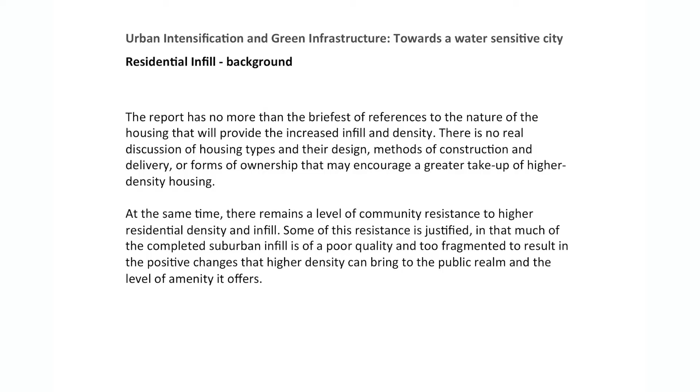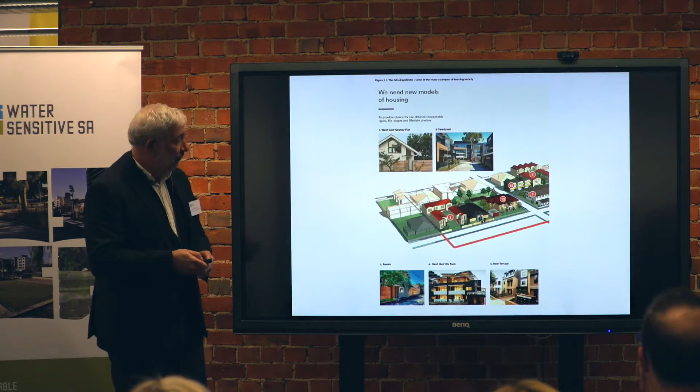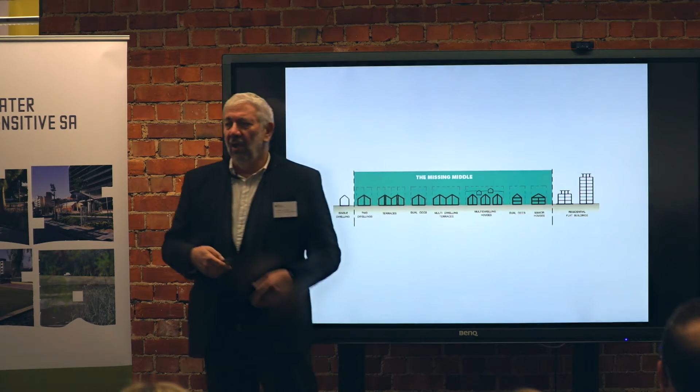South Australia and New South Wales are leading the way in this area at the moment, and of course the New South Wales document, which came out last year in its draft form, followed the very good SEPP 65 document, which changed the whole trajectory of apartment design quality in New South Wales. So they're now looking at doing the same for what they call the missing middle, a term we've all embraced willingly over the last few years. That middle, which is what is between the single residential and the apartment block, and a whole range of housing typologies that could sit within there.

Some years ago, I was involved with Simon Anderson in putting this little booklet together for the Australian Institute of Architects. And the basic question was, how do we improve the current standard and opportunistic piecemeal suburban infill that's going on in our cities? And we invited 20-odd architects from around Australia to put forward propositions that demonstrated how design intelligence might actually affect this kind of higher density outcome.

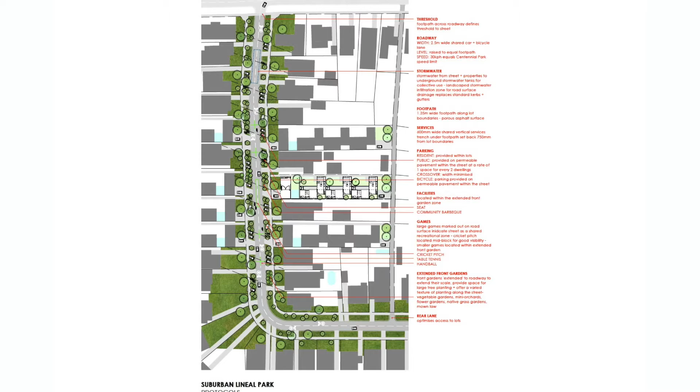And I often refer to this single example as embodying a number of very good ambitions. And this is by Neeson Murcutt, Sydney-based firm that you may be familiar with. But what they were proposing in long existing sites in an area called Five Dock was a tripling of the density. So this is the, can you all see if I, yeah.

3 smallish units, and again, we are still building the largest houses in the world. We're still up around 230 to 240 square metres average. So these are much smaller units, but with a degree of adaptability, flexibility built into them that allows a variety of different household types to take up residence in there. Some shared amenity out the front. You know, there's a group party or entertaining room.

There's a dip pool, there's a workshop, and the argument is that with the increase of rates that is generated by this kind of 3 times densification, you would be looking towards a local authority to invest at least a portion of that additional return into a revamping of the public realm. So they're looking here at converting what is currently primarily a carrier of cars to crossovers to park into a form of linear park. All sorts of things happening along the street.

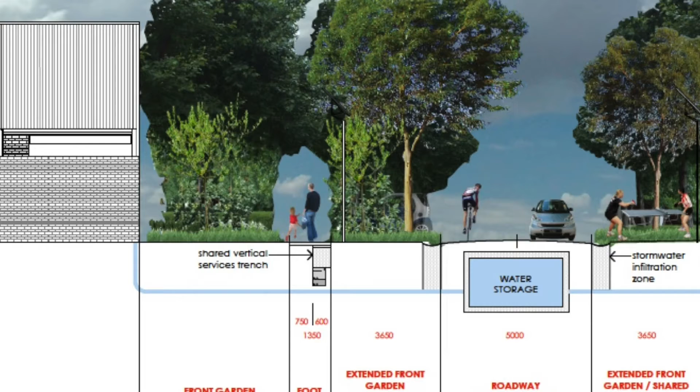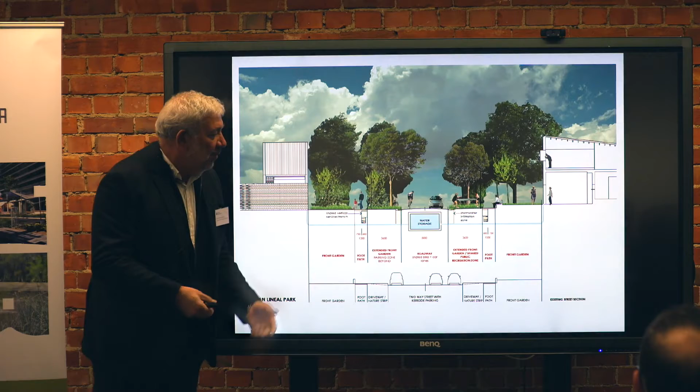Well planted out, lots of greenery with deep soil planting, water farming, that ambition that so many of us have but never seems achievable, which is sinking all of the utilities into a single services pit, so that you don't have to go digging up a street 17 times in 2 weeks to get access to all the different utilities. And you embed in these spaces, which now has a much narrower carriageway, a series of recreational opportunities. So it becomes a space in which people can engage with one another. It helps promote the idea of community.

And that's a closer view of the houses themselves and that section of the street that it is able, through its increased rates revenue, to finance. And if you look closer at the units themselves, they're simple L-shaped courtyards. By incorporating another small courtyard at the rear, you increase a sense of volume and space internally. You increase the potential for airflow.

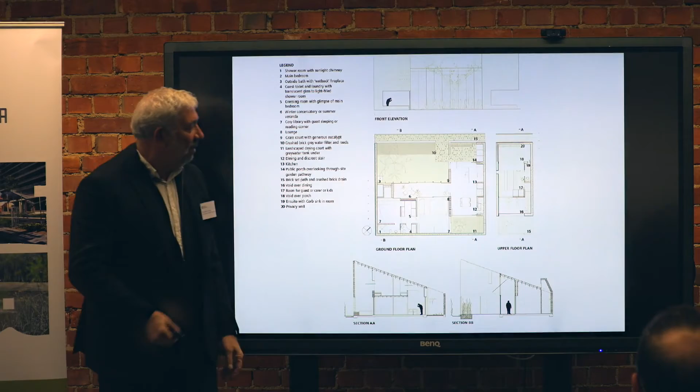There is a small upstairs space which can be used by children, a carer, a friend as a spare room. There's also, you can't see it unfortunately, a bench built in at this end which can convert to beds. So it's a house that has a degree of flexibility, as I said, that can accommodate a whole range of household types. And all of that comes through intelligent design thinking, focusing on how you might extract the maximum from what is in fact a very small area of house.

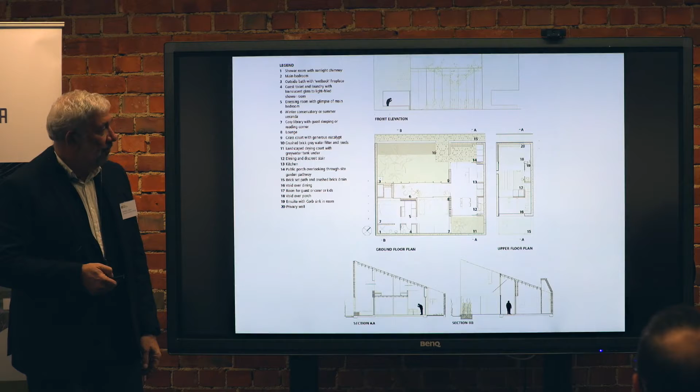Then when I was working in Victoria, I was really interested in exactly what was happening in the marketplace, looking back on what was happening in Western Australia, what was happening in the marketplace in Victoria in terms of infill in the middle ring suburbs, the Greyfield suburbs. And I was also interested in that question, if you started to apply, again, real design intelligence, what might you develop in response to what the market was doing? So my office commissioned the Monash group to take this on as a design research project, and this is where I hand over to Nigel to talk about exactly what they did do.

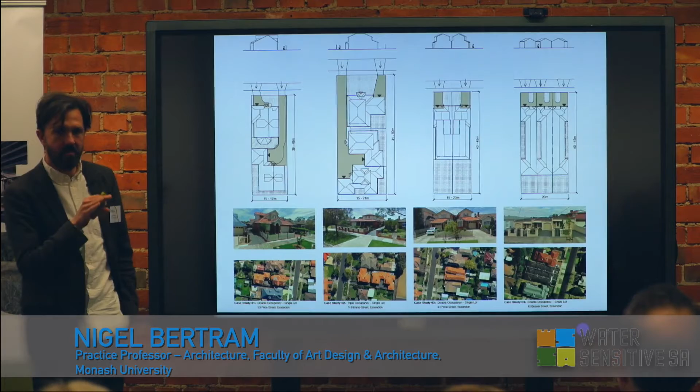Here. So this is work that's done with the group called the Monash Architecture Studio, including colleagues Shane Murray, Diego Ramirez Lovering and Leanne Kaur. And as Geoffrey said, it started off by looking in the middle suburbs at what was happening and a kind of an experiment with could we do something better within the existing rules in a plausible way that would be doable. So we looked at suburbs, if you know Melbourne, like Essendon, around between 10 and 20 kilometres out of the city, and looked at these typical dual and triple occupancy developments. You can see there's the buildings behind each other. Whoa. 3 in a row and 2 side by side and 3 side by side.

And a common factor in all of them was that the open space and the distribution, because they're primarily single story with some 2-story elements, was fairly congested, like the Western Australian examples Geoffrey showed, and also really determined all these ins and outs. The more we looked into why they are like this, it's determined by car turning circle regulations, and all the rules that apply to getting vehicles in and out of the site had much more influence on the way the buildings ended up than any idea of what would be a good space or what would be the best way of arranging 2 or 3 buildings on the site.

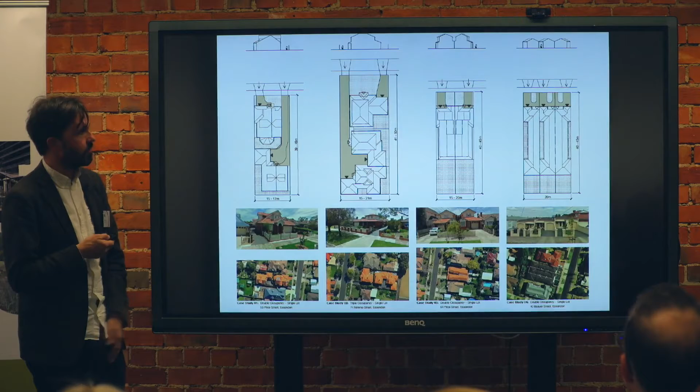So then we found another type was 2 lots that were joined together, where you could have a central driveway coming in with, say, one building accessed from the front, other buildings all with engaged garages. And you can see this dark grey tone showing the area not for cars to park, but just for cars to get in and out of these garages. And the hatched areas, which are the living spaces, are all pushed to the periphery and kind of secondary in the design hierarchy.

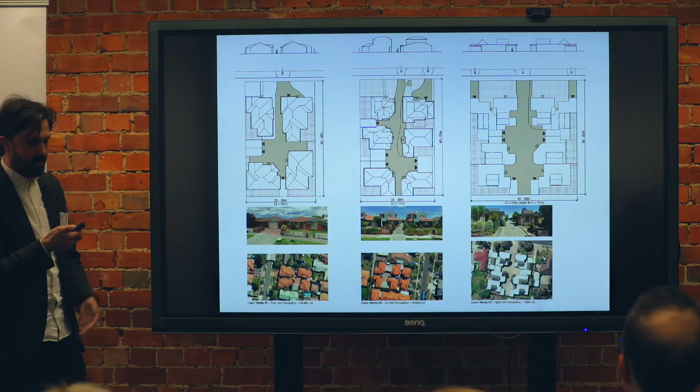So we tried to understand the typical scenarios in order that we could come up with some strategies that would be replicable, not just in one site, but across all of these inner Melbourne suburbs. And we did a lot of research working out what were the types of block sizes, because the actual dimension has a big impact on what's possible. So if you've got a block that's 15 metres wide compared to 18 metres wide, that makes quite a big difference if you're looking at off-boundary construction, which we were assuming here because it's a suburban situation.

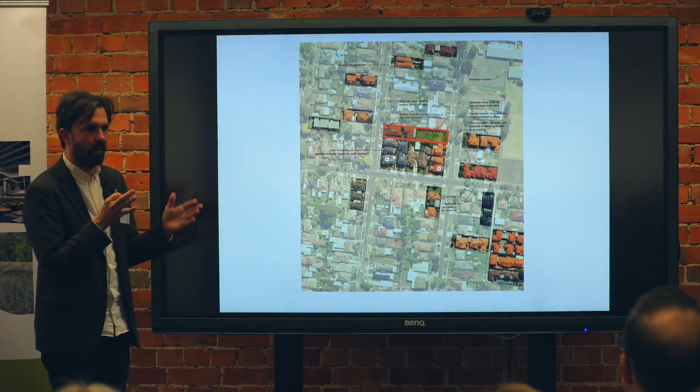And this is an aerial photograph of Essendon, just showing the number of sites in a kind of 5 to 10 year period that are turning over. So even though there's no particular strategic urban design vision, the suburb is changing quite a lot, and each one of these sites involves demolishing trees, reducing the overall canopy cover, affecting the biodiversity and overall sustainable performance of the suburb. And it continues and continues, and we're kind of using up the opportunity of houses reaching the end of their lifetime and transitioning into another 50-year period.

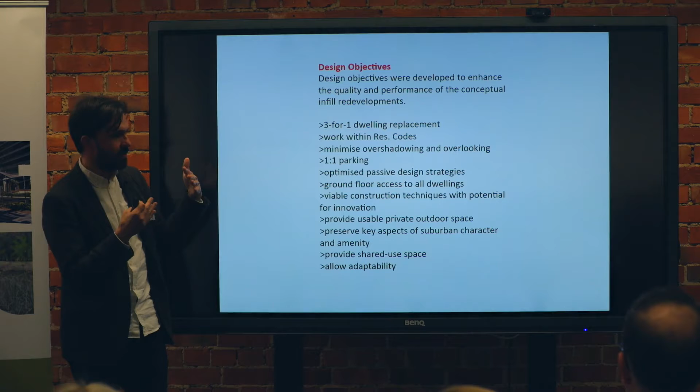So the design objectives set in the brief from the Victorian Government Architect were to look at a 3-for-1 dwelling replacement ratio as a base case. Working within Res Code, which is already a bit out of date, but within the current envelope controls of overshadowing and overlooking, so we didn't have to rewrite the rule book to achieve it. And part of that is minimising overshadowing and overlooking, which are typically in those developments achieved by putting big screens in front of decks and balconies, which makes them feel even worse.

Having a 1 car per dwelling ratio as a baseline, and we'll talk a little bit more about future transitioning of car spaces, which are taking up a lot of the space of our suburbs. Optimising passive design strategies, providing ground floor access to all dwellings, so we're not looking at apartment typologies in this particular study. Viable construction techniques with potential for innovation, so things that could be simply constructed within the non-commercial building companies, so not needing cranes and other apartment scale technology.

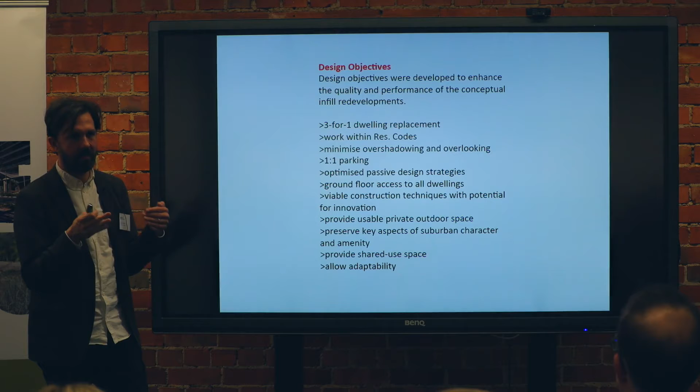Very importantly, providing usable private outdoor space and preserving key aspects of suburban character, which has a lot to do with the landscape character. So that means smaller footprint buildings, essentially, to leave more space for deep root trees, providing shared use space and allowing adaptability. And this work is all kind of pre-design, it's more strategy planning. We thought we really had to rethink the nature of the house itself.

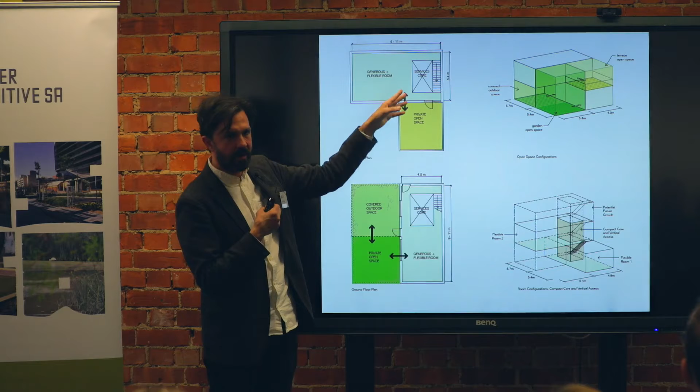And as a starting point, we looked at an idea of large rooms that were all within conventional structural spans, that were large enough to be used as a flexible space or subdivided, and the report goes into detail about how these can be subdivided into bedrooms for different family and household types. Each of these rooms is supported by a services core of wet areas, distributing those wet areas throughout the building, and importantly linked to private outdoor spaces or open spaces.

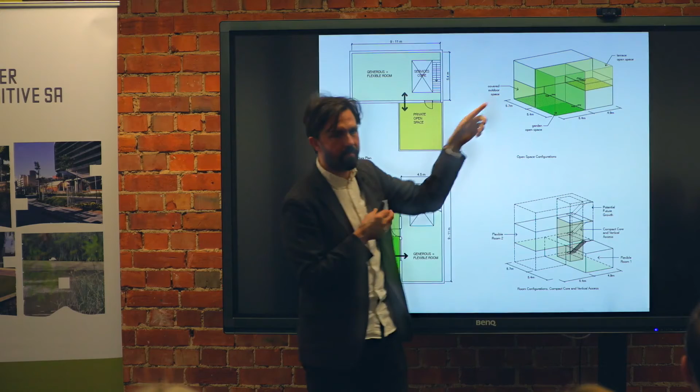So the diagram up here shows the green as a covered outdoor space, a large volume courtyard type garden space and a raised terrace space, and the white behind it is the built volume, thinking how each of those internal built spaces relates to an equivalent outdoor space, to give the positive and negative equal emphasis.

We also wanted to think about a small and affordable dwelling that could easily be expanded. So we think about future adaptation that within the current envelope controls, you could add another story on top by extending the core, or we could infill certain areas.

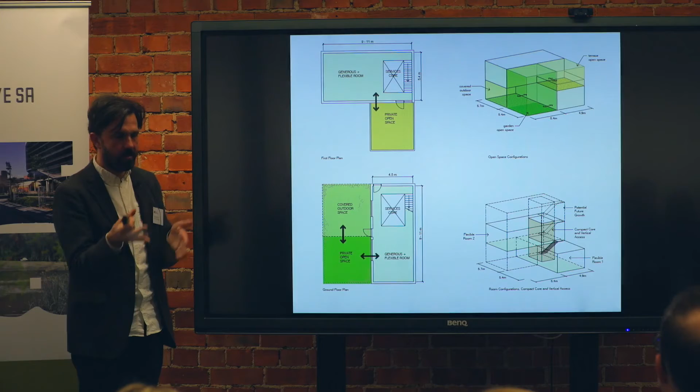So there was a lot of work backing this up about how household structures are changing and how we might need different arrangements of flexible spaces that could change use over their lifetime. They might start off as a bedroom and turn into a living space, for example, but all of this is possible here. And then we looked at applying this to a series of typical sites in combinations of 2 and 3. So 2 back to back, 2 side to side, and 3 in a row.

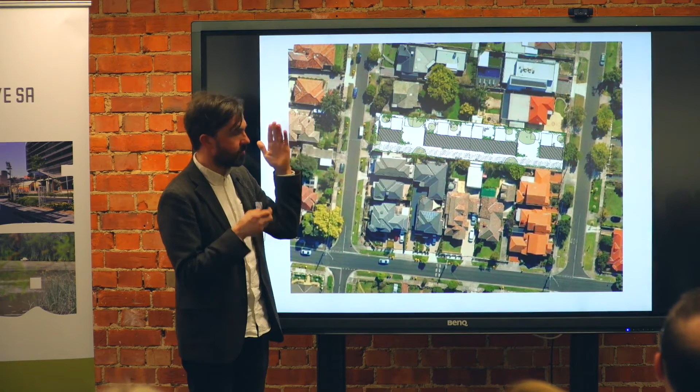And in the process of doing that, we can think about other objectives, such as increased permeability in the suburban block at both a visual, a tree canopy level and a pedestrian level. And this first model, which is an application of that base unit across a linear site, extends a bit of the thinking of that Neeson-Murcutt Five Dock scheme, but across 2 sites where you can join one street to the other, and achieves 3 dwellings on each site, but leaves, importantly, a quarter of the site as open space.

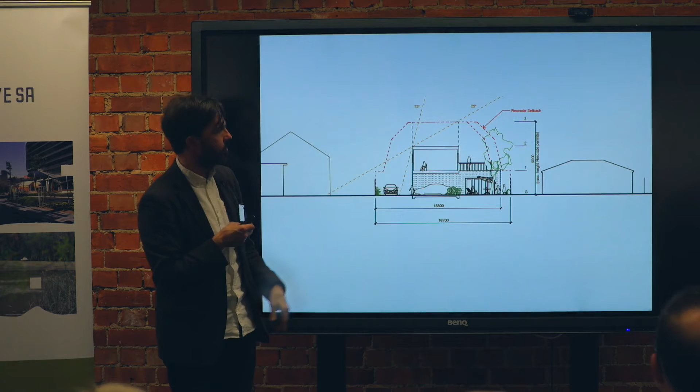And you can see that all the buildings are off the boundary. They all are arranged around a well-oriented courtyard, and they provide good privacy and a sense of communal shared space. The volume, the potential 3-storey volume, is located in the centre of the suburban site, so it has minimal impact on neighbours. And this red line is the Victorian envelope control at the time we did this study for a typical suburban growth zone, and it deals with overshadowing and overlooking.

And this series of plans show the strategy for dealing with vehicles. So we started off with this idea of 1 car space per dwelling that had the potential to either be located in a carport situation as a drop-off, or in this communal open space in the middle. And then the next phase of that would be that we'd say, well, these undercroft spaces are no longer able to be parked in. They might be used as a covered living space, or indeed filled in as a room, and therefore the cars get restricted to coming into the site to this point on both sides, and the cars are parked in the communal area.

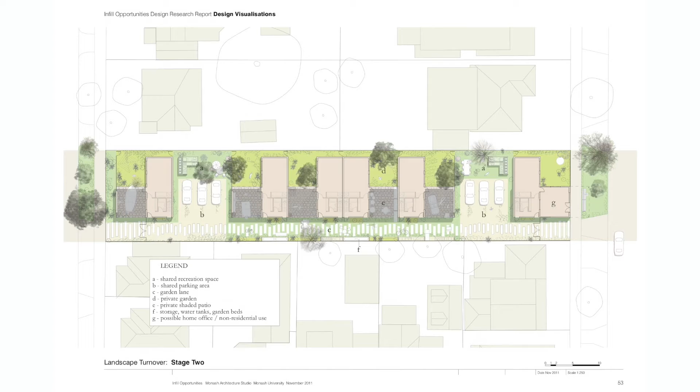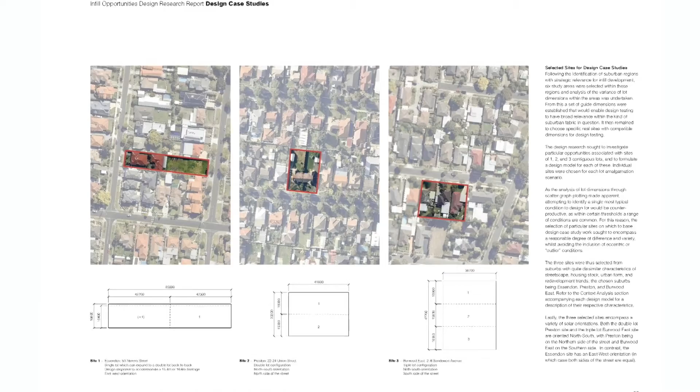And the eventual outcome might be that the cars are switched to more of a share car scenario, or there's less parking provided on the site, and it could be a flexi car, share car, or an electric car that's teamed up with changes in the streetscape, and that central space is given over to communal open amenities such as vegetable gardens or indeed guest spaces.

The project, as I said, looked at back-to-back, side-to-side and 3 in a row examples, and quite a lot of work went into the dimensional properties of those. The yields, just to show the 3 models in a row, there was the linear L-type one, what we called a mansion type, which had a larger building at the front and smaller buildings at the back, that got 6 to 7 dwellings over 2 sites, and the cluster type over 3 sites, where a more complex arrangement of courtyards and access to the individual variants of this basic room and core model were applied.

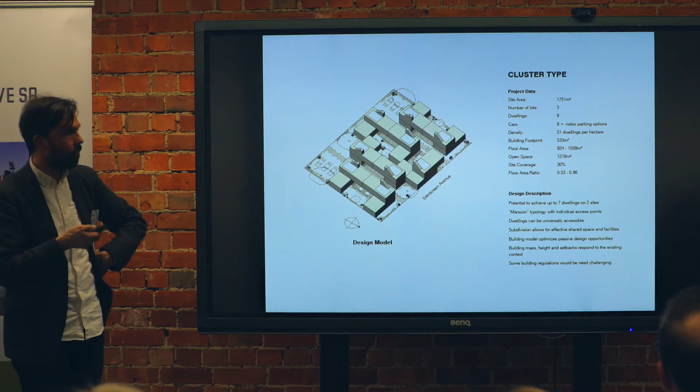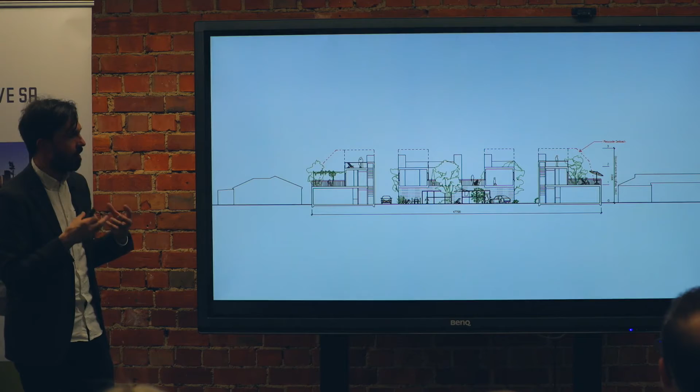And when you look at the cross-section through that cluster type, you can see the kind of grain and intricate density that's achieved at a two-level plus roof terrace type scale in relation to existing buildings. It's not a kind of threatening scale. It's quite a lot of open space and greenery, and cars can be included in the site, or they could gradually transition. So it's a porous, small footprint model.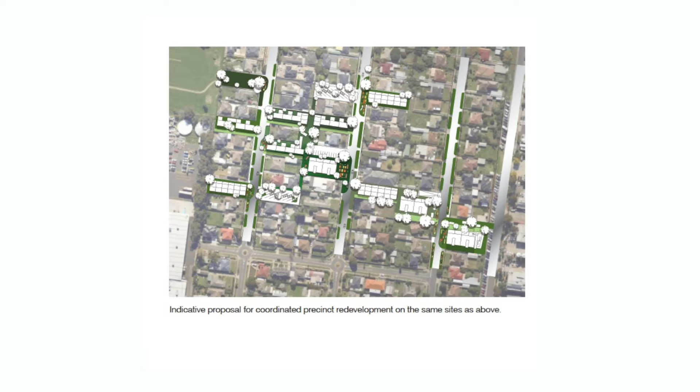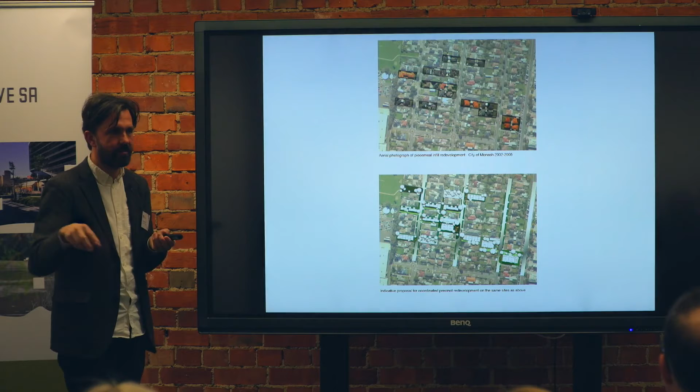And that project got us thinking about if you took that thinking on each individual site and took the scale of development that was turning over in these suburbs, could you think of that as not 8 or 10 different projects, but more strategically as one project that evolved and was implemented in stages? And if you did that, then some of those through paths that we were trying to implement in the back-to-back one, or the courtyard spaces, could join together and create additional urban design benefits that could get us past the totally atomized nature of every lot being its own island within the suburban fabric.

And that led to another project which was done under the funding of AHURI, the Australian Housing and Urban Research Institute, which looked particularly at public housing land holdings. Again, in similar suburban areas, houses in the so-called greyfields, which are reaching the end of their useful life. They all had maintenance issues and were looked at by the Housing Authority to be redeveloped into dwellings more suited to current demographic needs. Typically, small houses on fairly big lots, underperforming environmentally and in need of refurbishment.

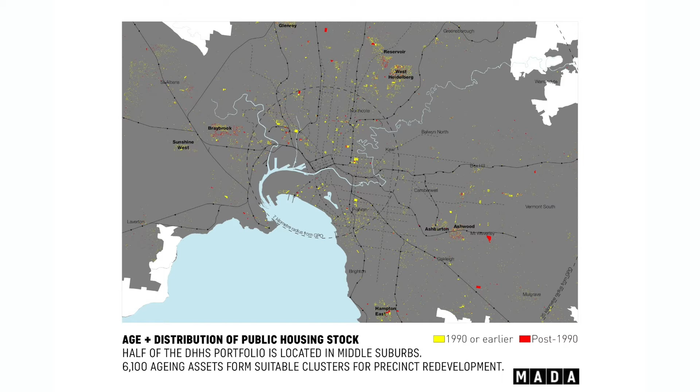And we did some analysis, this is quite specific to the public land holdings of the area. All the little yellow dots are, at the time of this study, which was about 2013, all the government-owned land across Melbourne, and we tried to identify, of 20,000 total allotments, which ones could be used strategically to kickstart a transition of these middle suburbs. Could government be a catalyst agent or a transforming agent that could lead the private sector and give examples of how individual allotments could join up into a more comprehensive precinct-based approach to suburban development?

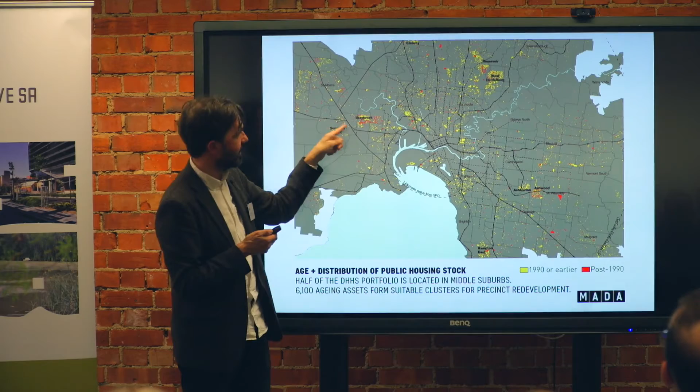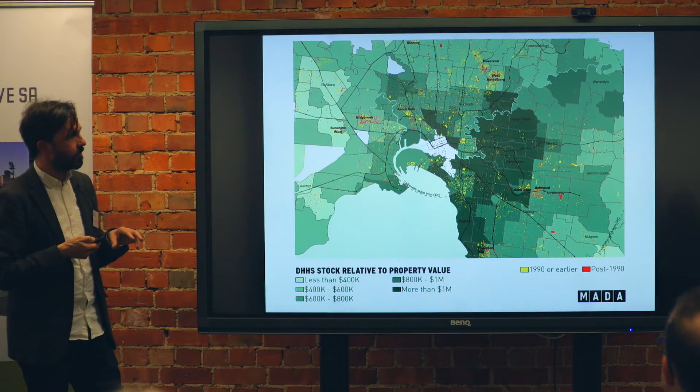Part of that, this graph shows the same land holdings in relation to land values. Over time, since the founding of these original housing estates and their original selling off, land values have shifted in Melbourne, so some of these allotments are worth a lot more than others. And we had an argument about cross-subsidising development. If you thought of it at a whole metropolitan level, could you cross-subsidise development in less valuable areas from that in more valuable areas?

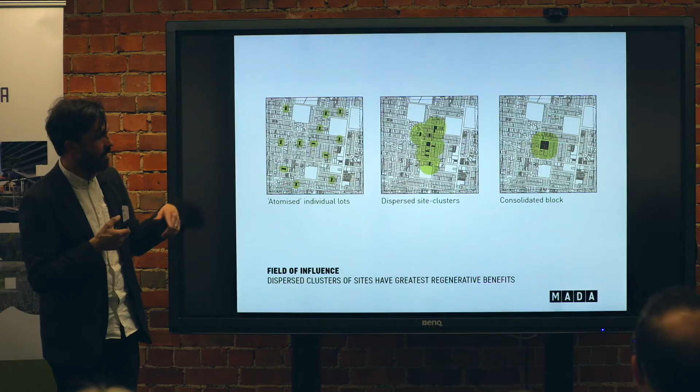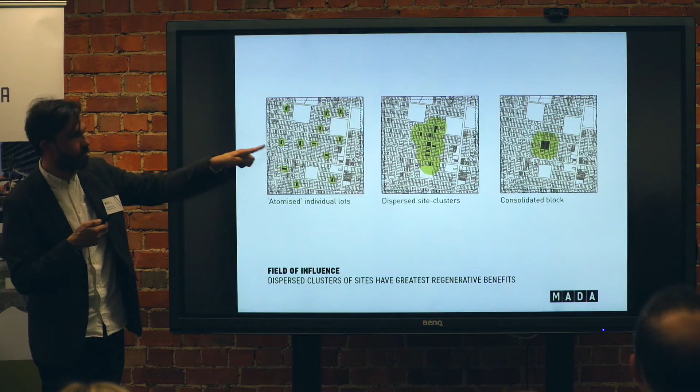The middle condition here shows the typical pattern that we observe, which is a kind of disaggregated clustering of one, two and three allotments joined together. The yellow dots were all in these groups quite close together because they were a previous conjoined housing estate that had been sold off or privatised, but not completely. And that had an interesting potential energy for change, the green area here, when compared to completely individual allotments or a more consolidated development, which is typically more attractive to developers but can be seen as an island or even a ghetto.

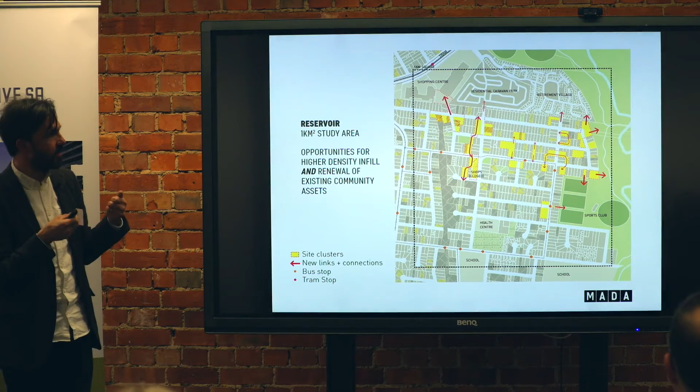So this is two study areas. One was in Reservoir. The yellow shows the current public housing ownership. Within that, some sites have more value than others. Could we use these allotments to open up connections and create not only good housing outcomes, but good connectivity, open space, functional servicing, water sensitive features and so on?

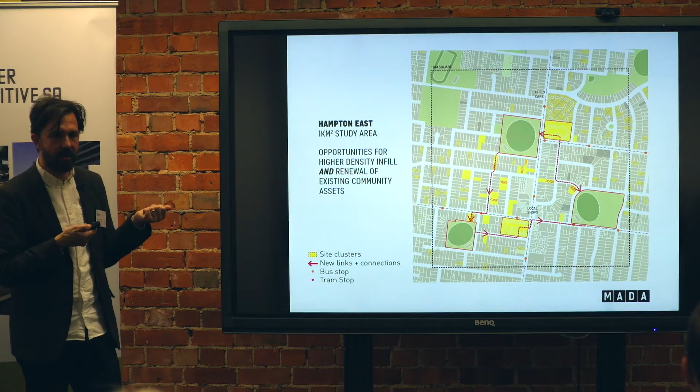And in the other one in Hampton, which was the higher value suburb, a similar scattered landholding could be strategically used to join up existing open space amenity, all these sports fields, into a network that could support a higher density. So making the existing amenity work harder. And that was developed into some test scenarios of 12 allotments. So there were 12 of these yellow sites thought of as one development.

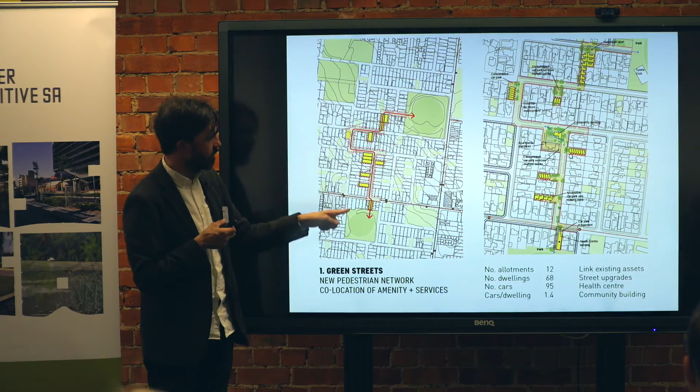This one, where there's a street that could join these two ovals together, could support higher density models that in a piecemeal way transform the streetscape over time, with the idea that the white private sites might follow the lead of the public sector. Or we could target existing infrastructure such as strip shops that had closed down and use that different grain and typology in conjunction with the government-owned land to make a network of activated paths, creating a different grain through the suburb, connected to transport and open space.

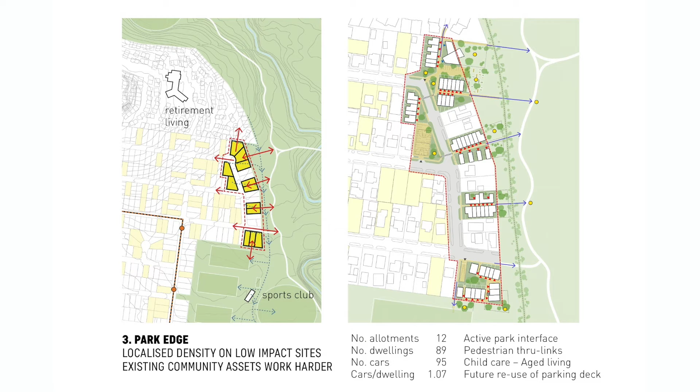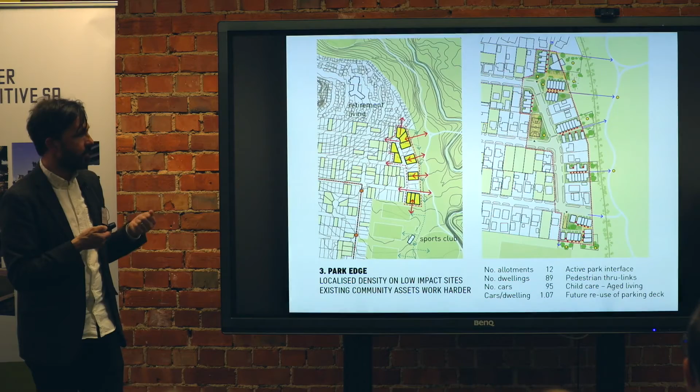Or look at such things as this, which is all over Melbourne and I'm sure most Australian cities: big park areas that are fairly underused and have blank frontages. Could the allotments that face such a park be redeveloped in a way that they also open up access, increase the use of these spaces, allow water drainage to be coordinated, and connect to retirement areas, and all these other fringe benefits that densifying could allow and financially support as wider objectives for the community?

Importantly, we ran a design studio and tried to have a community consultation process as part of this, because we realised that for such a suburban precinct transformation, you really have to involve everyone: the social housing tenants, the other tenants, the local authorities and so forth.

So we had students work to visualise kind of before and after scenarios of the park edge, and took these design propositions and collages and so forth to the community, and with models, and talked through what kind of change might be acceptable to it, and how could the community get on board with the transformation of their suburb rather than have it just happen to them in a passive way.

Because, as I said before, these suburbs are all changing and they're being developed in ways that most people don't like. They either don't like them because we can see analytically that they're not performing well, or they just don't like them because they feel mean and the parking is a problem and all those usual suburban issues. But we found that by talking about it more as an opportunity, right, the change is an opportunity for getting things that they don't currently have, we could put a positive spin on it and allow people to have a say.

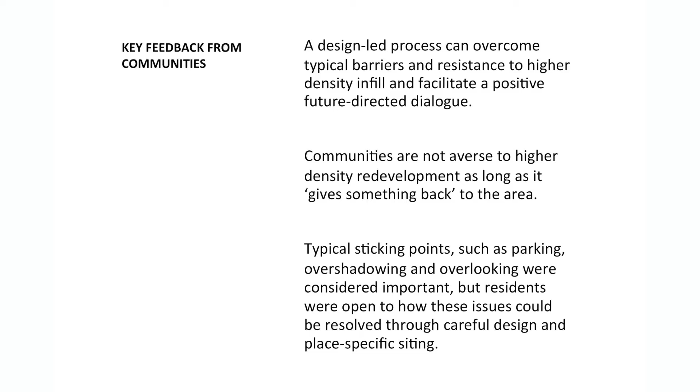And three of the things that we found out of that process were that actually a design-led process where we could show opportunities for transformation and ask people to respond and engage with those can overcome a resistance to development by letting it be a more positive process where there's a chance to have a voice.

The second point is that people, in our two case study consultations, were not necessarily averse to development per se, but they were sick of development that just took away amenity and didn't give something back. So if we could show that higher density and more people could allow the suburbs to have shops that were open, or small meeting spaces, or community facilities that they didn't currently have, that would be a positive outcome.

And sticking points such as parking, overshadowing and overlooking, which were all common objections in middle density, middle suburban development, could be overcome by thinking about careful siting and where height could be accommodated, or where is a good place to put a volume, rather than having blanket height limits and saying we don't want any development over 2 stories, full stop. So we found it to be a very open process, understood as a community engaged transition process that might unfold over, say, 20 years, rather than a yes or no to a single development outcome.

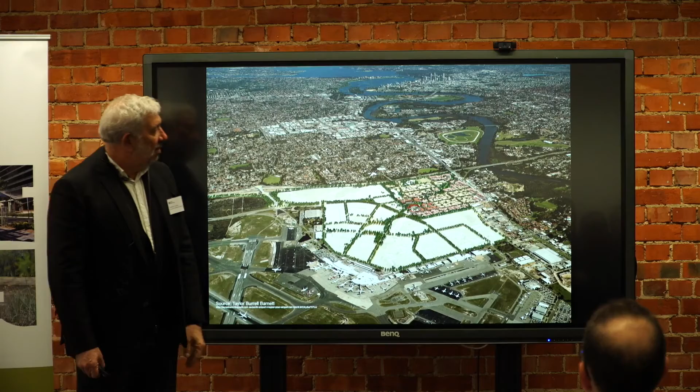So the train station will be around here, and high density residential around it. The Housing Authority's holdings are in this area, which is Redcliffe, and you can see it's really strategically well located. It's very near the river. You can pedal to the river in just a few minutes, and there are a lot of recreational opportunities around the river. And it's very close to the city, very close to the airport. So it's going to become very high value land on which we now have some housing which is well and truly beyond its use-by date, some that is not, but that will be a staged development.

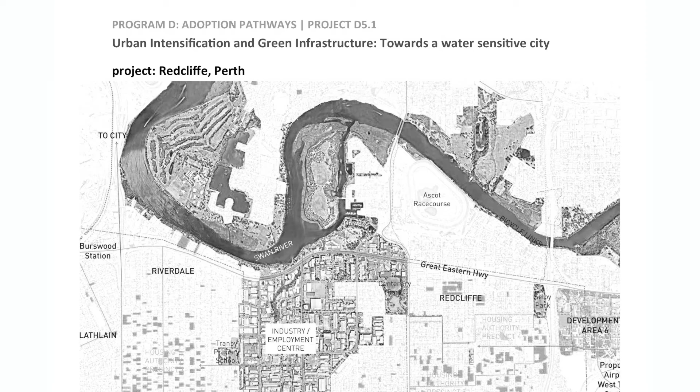It's another image of Redcliffe. Redcliffe is in fact bisected by a large industrial estate. I can't see that going in the near future, but eventually it will go, because again the value of the land will outstrip what's on there.

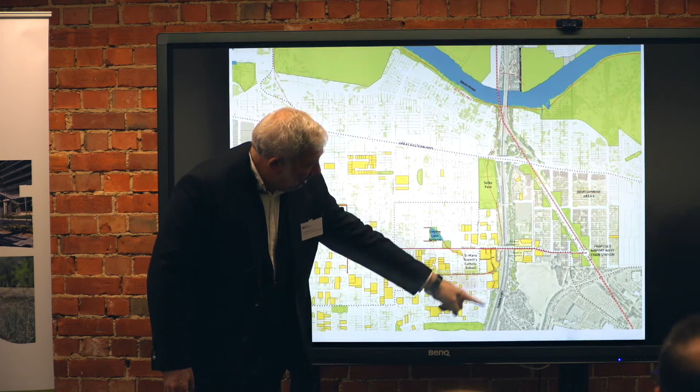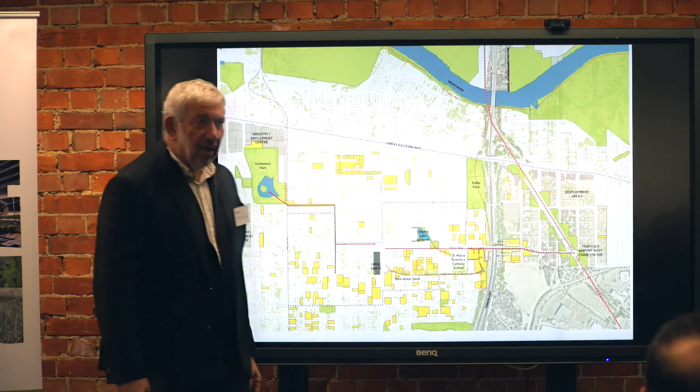So what we were looking at was the potential of converting this street, which links from what is a major freeway, the Tonkin Highway through here, and there's a bridge over the freeway there, back to a small local set of shops, but also links back to what will become the underground train station on this side of the highway, with all of its higher residential development around it.

This shows it in a little more detail. And the suggestion was that this become the linear street, the linear park that we had described earlier with the Merkert-Neeson project. Obviously still enabling local traffic to move through, but quietening that traffic down by using the street for other purposes. It becomes a shared street. All of these blocks we're looking at replacing existing housing, whereas the housing blocks at the end here are on land that is currently undeveloped.

This was stage one of the project. Stage two is in fact taking the type that we generated and developing it for this site. We're in fact assuming the role of master planners, and the plan is to commission 3 or 4 local architectural practices to develop the particular types for that site.

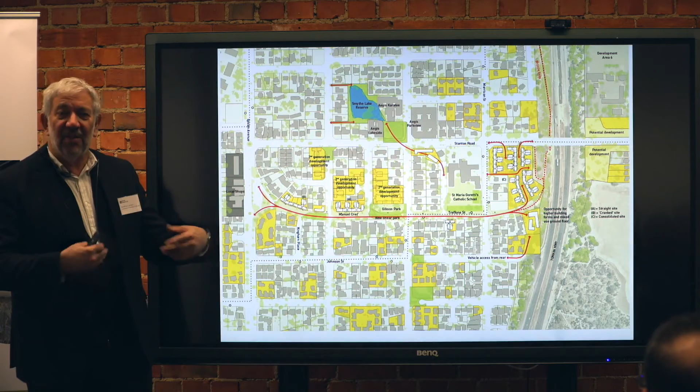We've always argued that the single typology that we developed here was just an example of, rather than the answer to, because there are numerous strategies that can be adopted, but we thought that this one did in fact embody a number of principles that we are keen to make consistent in terms of this kind of development.

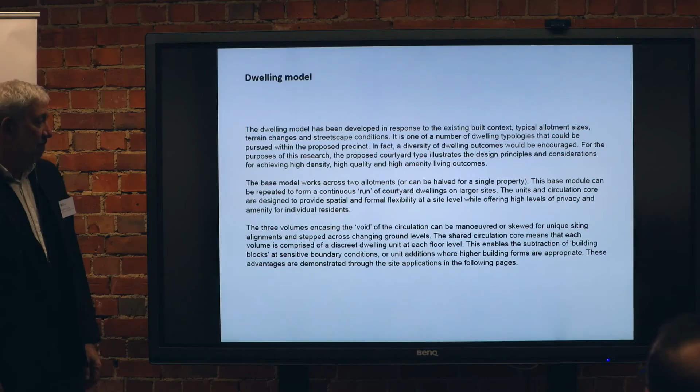So we looked at a base model that would sit ideally across 2 sites, but it could also sit across sites that were amalgamated beyond the 2. It could also sit on a single site if need be. We tended to try and put the bulk of the development towards the centre of the site. So again, you weren't impinging unreasonably on neighbouring housing, and we were also conscious of maintaining privacy for those neighbouring houses. And we established 10 design principles.

Rather than me go through each one of them here, Melissa, you'll have this available to attendees? Okay. But very quickly, we thought it was important to have within the complex a mix of dwelling types. There is a real lack of diversity available in the marketplace at the moment. We were concerned that there be a true mix of types. We were looking at achieving a minimum of a 3 times density improvement. We were, as I said, looking at controlling scale so that it did not become something overwhelming to the existing context.

We were very conscious about how so much medium density in terms of apartments uses gallery access or corridor access, which inhibits a whole lot of good design outcomes that you may otherwise wish to achieve. One clearly is privacy. Another one is when you've got a double-loaded corridor, cross ventilation becomes impossible. Access to solar gain also becomes difficult.

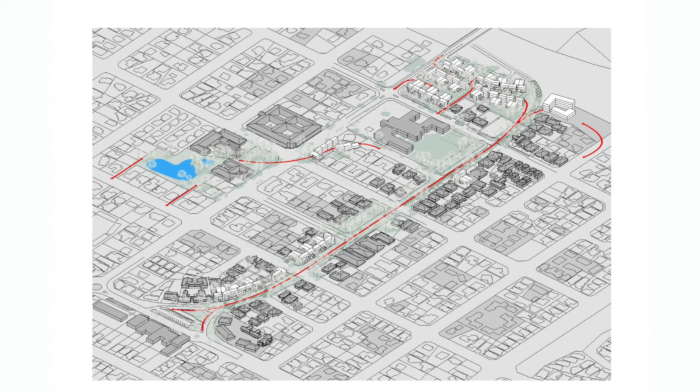So this gives an indication of, with the white forms, what we were proposing in terms of the new development. The site that we're looking at was also originally largely swamp, and there were market gardens through here. So we have some interesting water issues to deal with, which ties back to our D5.1 interests and commitments. And we're looking to see how the presence of close to the surface water there can help enhance the public realm.

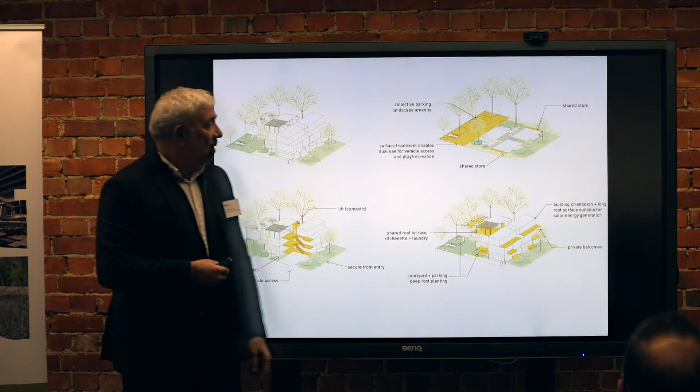So this was the type that we did develop. So here's the footprint, where you've got the hallway with access to stairs and a lift. You've got a driveway that goes up in a single direction and out in a single direction back onto the street, and a parking area with a permeable surface. And you have courtyards, which allow deep root planting.

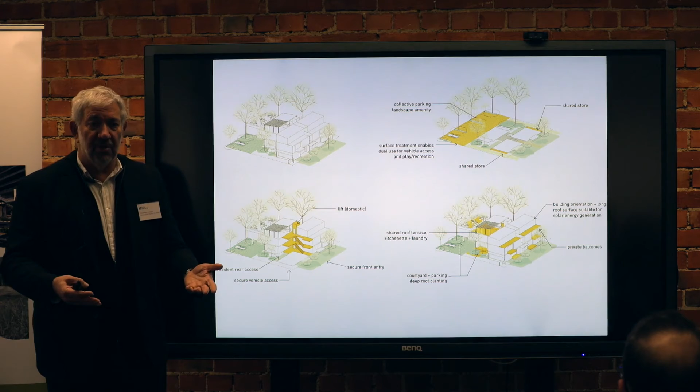Then you see the stair hall in the centre of the building. These again, like the work that Monash did for infill opportunities, are diagrammatic. They are not developed designs. That is the next stage of the project, which we're now engaged with. And the project goes up 2 stories to the street, 3rd story set back, so it's, in terms of scale, less of an imposition on the street, and a shared amenity at the rear. So the rear building is kept lower.

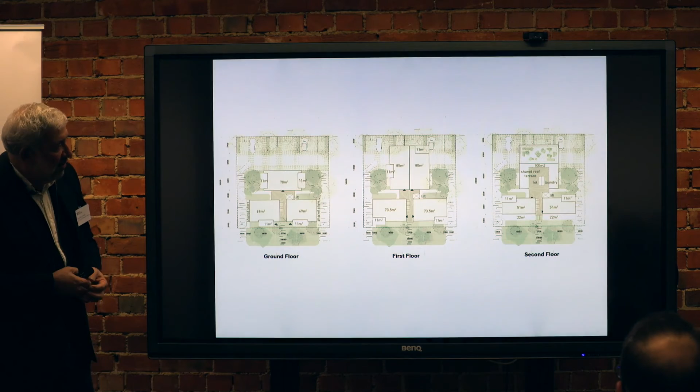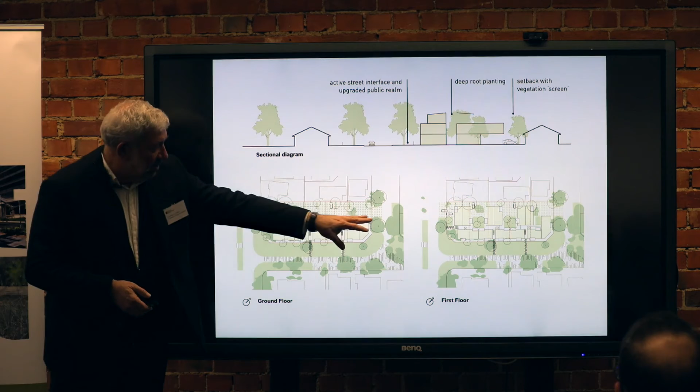We have different site configurations. This was a corner site which allowed a straight through road to go through the site as against the U-shaped road on the other example that I showed. So we were looking at a range of different siting opportunities. We also looked at some very basic form studies. Again, these are diagrams, just looking at where major openings might sit and how you might configure corners so that as a building hit a corner, you either would increase the scale or reduce the scale, depending on the particular context in which it sat.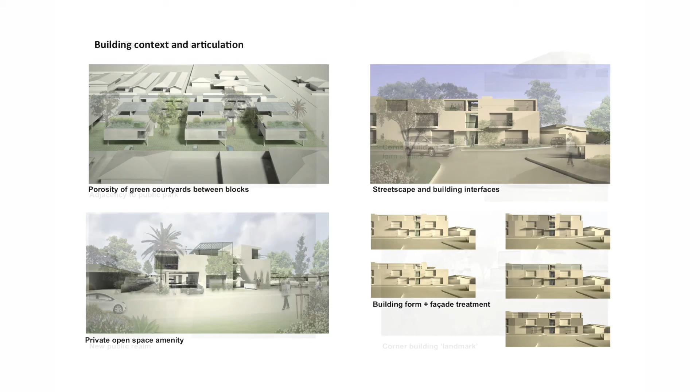And we looked again at the public realm. Still diagrammatic, but we now have the opportunity to take this further. So this is the site that we're currently looking at. We have 4 existing residences which will remain, and we have a quite large site. Do you recall the area? No, but there's about 110 dwellings. About 110 to 120 dwellings, depending on final configuration, and they'll vary between 3, 4 and 5 stories, depending on where they're located on the site.

The freeway is just up here, so there will be no development to the north impeding it, and the views to the northeast in particular are quite spectacular as they look out over the airport to the Perth Hills. So there are some good opportunities on this site, and we're testing issues like car parking. You know, what is it going to cost if we go to half basements? If we put them all on the surface, what are the implications in terms of using up what is some very good surface area? And there is a collection of extremely good trees on the site, and we've had an arborist go through and tag all of those, and we'll be responding to their presence.

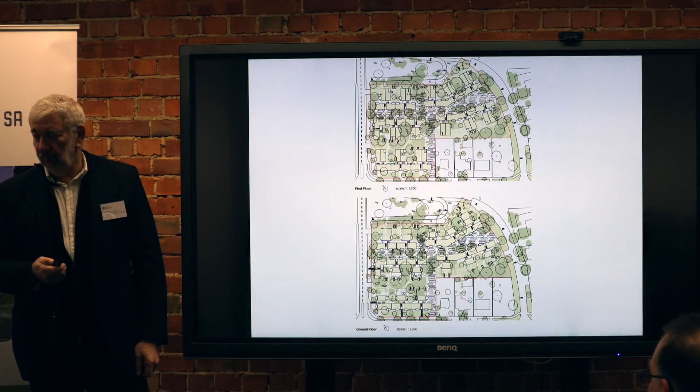I think that's important to say that on this site, the housing authority agreed that a key objective should be to retain all the significant trees, the jarrah trees, whereas the typical baseline Perth-style development is bench everything, demolish all the trees and set a level block. So that's a big buy-in from the housing authority.

It is, and topographically there's not a huge variation across this site. It falls across in this direction.

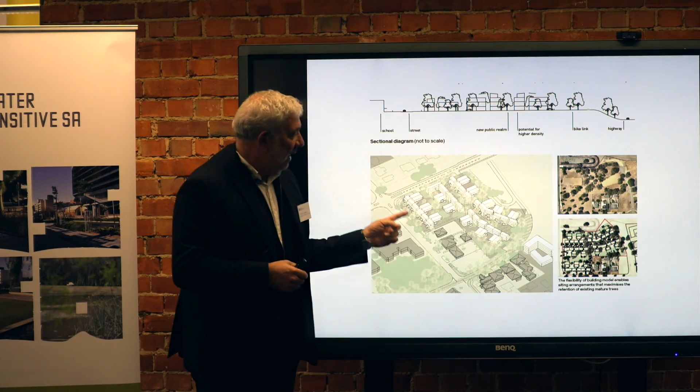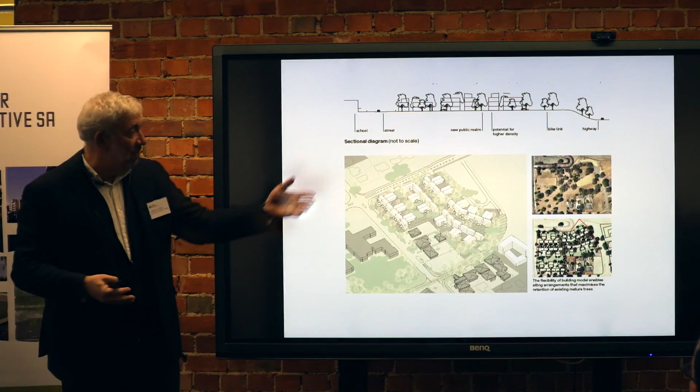These were the initial propositions that we put forward as part of that first stage 1 submission, which we are now developing. So it is using the single type that we developed, and our plan would be that coming out of the engagement with other architectural offices in Perth, from the principles that we put in place, we develop additional housing types, so that we end up from this project with maybe 4 or 5 different typologies that again become applicable in the marketplace.

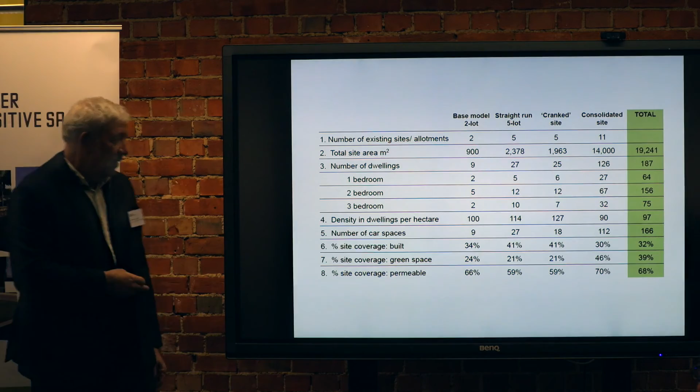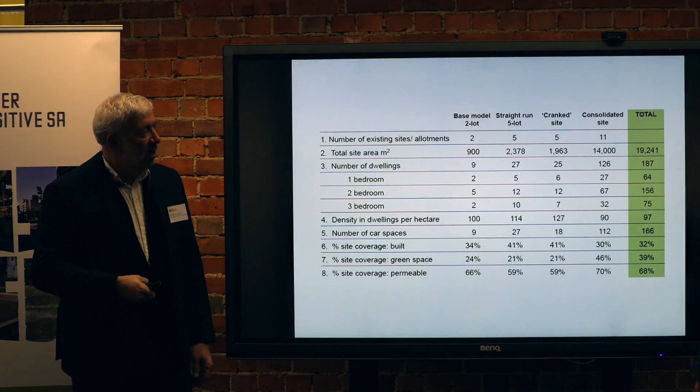The local authority was not all that interested in engaging with what is happening with car usage in other parts of the world, where it's rapidly dropping off, where individual car ownership is diminishing, where share car use is increasing at a considerable rate. That's understandable. They'll be under pressure from their ratepayers to ensure that that level of amenity is maintained.

And we thought we'd finish with just a couple of examples locally in Western Australia of some medium density development that are using typologies that enable a degree of adaptability and flexibility within the planning. They're very much responses to local building conditions, using local materials and local cultural expectations.

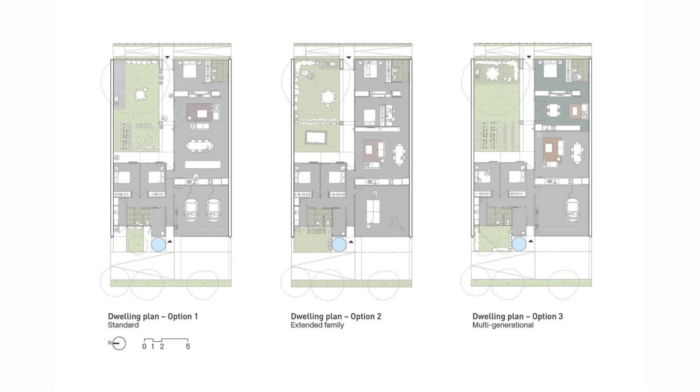But what's interesting is in the planning, and it shows up better in these plans, the variations that can occur within the single perimeter. So you can get a variety of household types within that single perimeter, and some of the units go up to 2 stories to give that variety even more richness and diversity. So multi-generational, where you could have 2 kitchens. The houses are certainly big enough to accommodate that degree of flexibility.

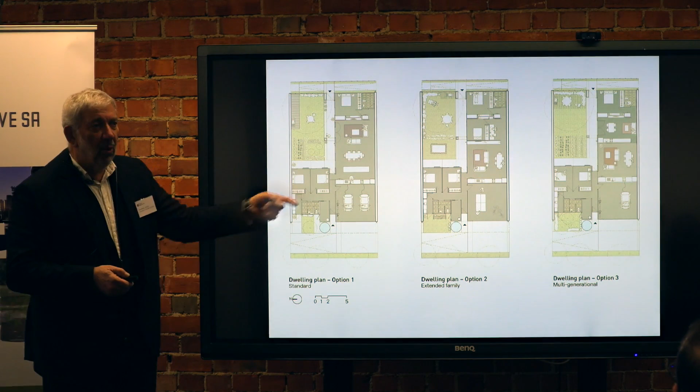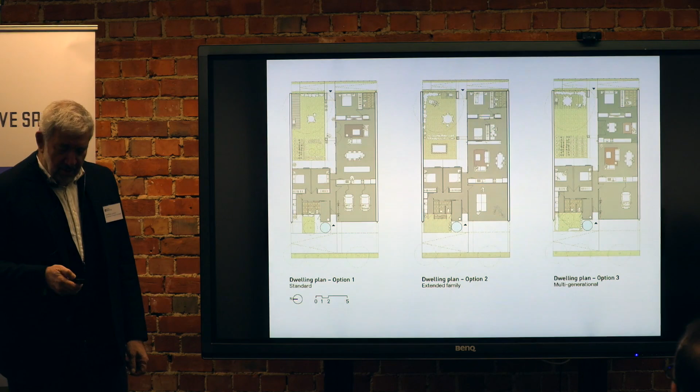The courtyards are all oriented to the north, so that you are able to saturate the courtyard itself with trapped sun, and the spaces are small enough to be water conscious in the way they're planted out. And the courtyard, I think, is a type that we need to develop much further here in Australia. Its potential is huge. A number of houses were designed with courtyards in the 50s and 60s, but that particular experiment never developed very far. And of course, every square metre of space there is usable, rather than all the residual space that is left around a normal residential development.

Another project which is not very far from that one, this is Knutsford, again just on the eastern edge of Fremantle, designed by a practice with the name of Space Agency, and with this project they won the Multi-Residential Award in the Institute of Architects nationally last year. Again, using local materials, even to the point of the local tubular steel pergolas that many of the Italian community use in Fremantle for pergola type structures.

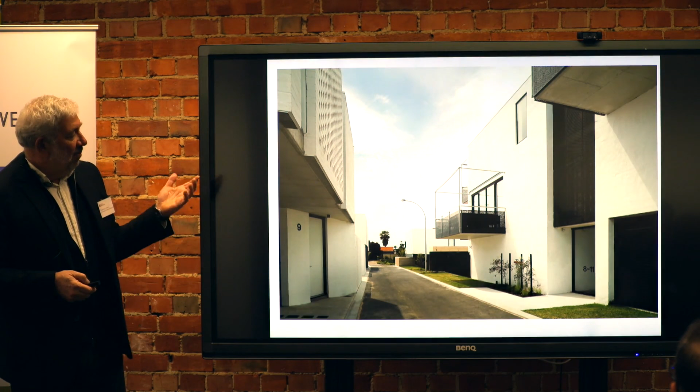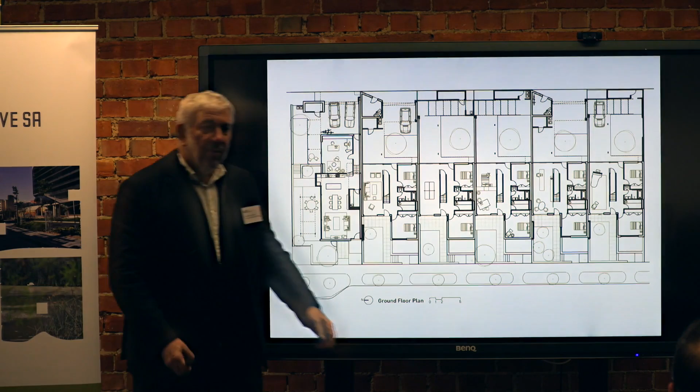But what is interesting about this project again is the degree of flexibility that is allowed for in the planning. This is the range of terrace houses that they use in here. On the ground floor, this major room here could be used as a living room, table tennis room, a bedroom and a study, a kitchen and a dining room as a downstairs flip to the otherwise normal pattern.

So upstairs you do get the living space, the kitchen, the dining, and an outdoor deck with views out in that direction. This particular unit looks out over their own courtyard, and over the garage is a small studio apartment, so that you're densifying again with a variety of housing types.